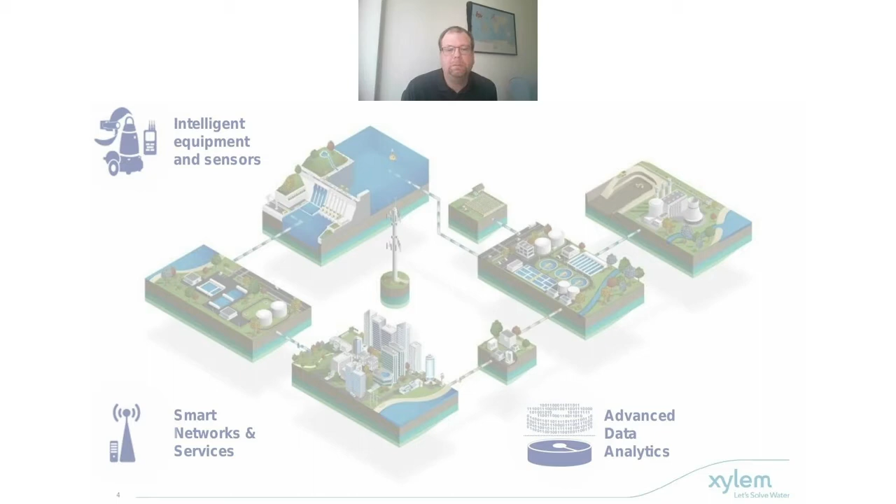One of the things that I was a part of was a group that put together information, talking to customers, contractors, and consultants to get information on where we are when it comes to BIM. With that, we put together a web page to share the information we have received. You can see the link here, which will also be shown at the end of the presentation.

One interesting result, not probably too surprising, is that 91% of the planners we asked design with BIM in the construction business today or soon. So that's already a very high adoption rate for something such as BIM.

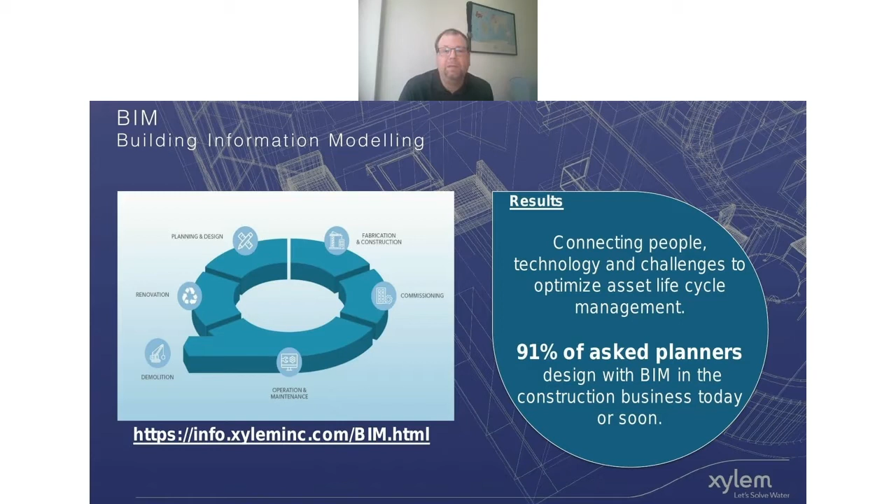But one of the challenges with BIM is it means different things to different people. Obviously, we have the life cycle of a product and a project, and what BIM means in those different stages. Then we also have the different stakeholders. BIM means something different to an end user or the owner of a facility than to the architect or to the manufacturer of a product going into that.

There's also the different challenges that you have, being able to capture water and energy footprint being one of them, being able to have labor effectiveness, OpEx and CapEx control. All of these different items can be brought together into BIM.

So we have the main different functions or things that BIM can do. Optimization is obviously one of them. Simplification, being able to have one environment for the life of a project. And transparency, so the manufacturer, for example, can give you the data, and that data can then go all the way from a project to the end user and to the maintenance guys that need to take care of it.

One of the interesting things from the business case that we put together was that one of the most important recommendations was for a person at Xylem to be responsible for BIM. As you'll see when we talk to Jamie Mills, we have that position, and Jamie has filled that role. So that was probably one of the most important things, that we need someone responsible for BIM for Xylem. And that is something that we have done.

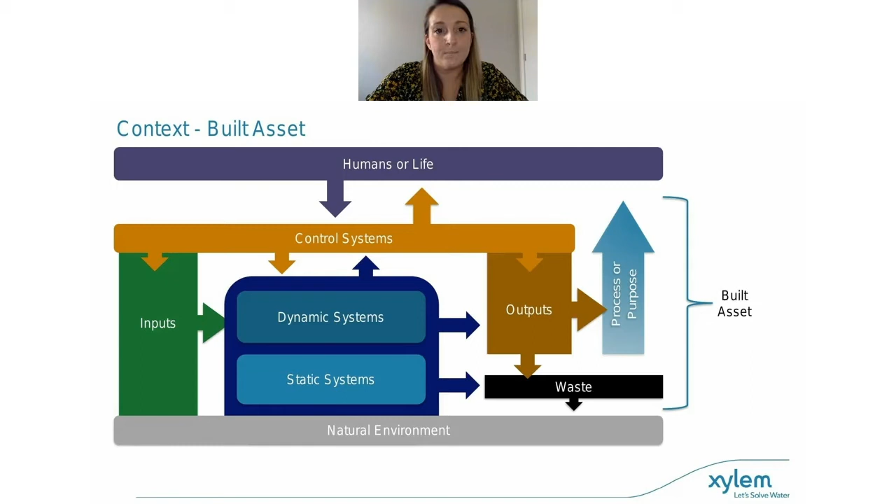Okay, so I heard some terms there, particularly around technology, and I thought before we jump into that conversation, it might help to boil things down and set a bit of background and context to what we're talking about. An information model, which we build up through the project delivery - the design and the build into the operation - is going to consist of different systems of maybe static or dynamic components. And if we're talking about a built asset, not a satellite or a spacecraft, it's probably going to be connected to the natural environment, with interconnecting forces or things that connect systems together. And of course, within the systems there's going to be products, and when we're talking about data exchange, it's the information, the properties that describe the individual products, that are important.

To deliver BIM, we're really talking about connecting those properties and data in a hierarchy and structure so we can make sense of it. You can see here in the schematic I'll present, I'm talking about inputs, which could be communication inputs to the information model or built asset, and outputs. Each system is going to have a function which feeds a purpose or process.

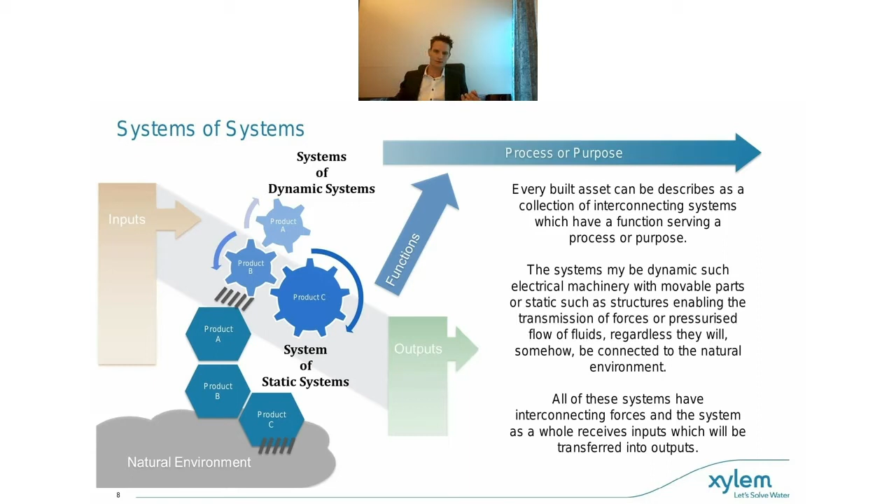Taking that a little further, I've put in the human or life layer - I say humans or life because sometimes we build built assets to do other things than feed human beings' needs. I've also brought in waste and the control systems layer. So the information model of the built asset is going to have different functions and interactions, which again feed this purpose or process.

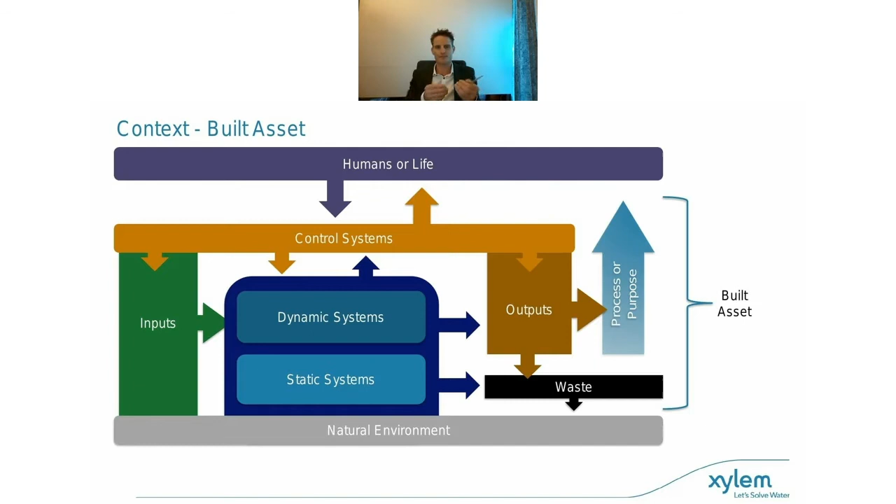And to do BIM, we're going to start asking questions. I've done a typical 20 questions here about what sort of things we'd ask to build a built asset, but we won't run through them all. At the very start, we've got to have a purpose - why are we doing this? Then there's maybe a follow-on to that, there's an output. There's a water industry example - it may be the treatment of wastewater or the treatment quality of clean, potable water for drinking.

We may have some questions or requirements about the environment. If we're going to be extracting water, we probably want to be quite close to a water source, whether that's a good underground water source or a river supply, etc. Then moving through, we're going to ask questions about the design - who's going to design this? How are we going to design this? I think you know where I'm going with this conversation, and that's building up the requirements we need to build a built asset.

As part of the BIM process, we're going to set out requirements at the start of a project to ask these particular questions. It's these questions that are going to get answered by the exchange of information. So what I wanted to do with that first couple of slides was just set a bit of context to what we want to talk about.

As we look at the life cycle of a built asset, we're going to ask questions about decommissioning. Quite recently I've seen something with nuclear waste disposal where we never asked these questions at the start. This is really important - to capture the whole life cycle of the built asset and ensure we've got the right information at the right time to make good decisions.

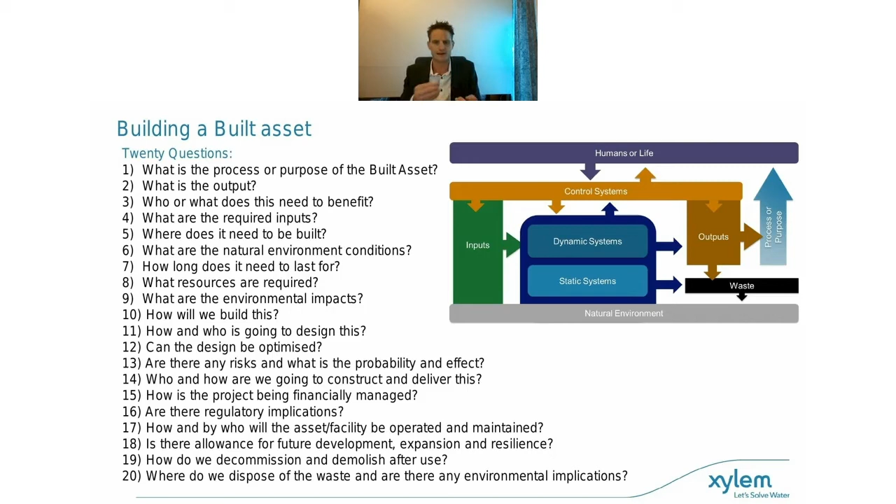I'm going to take that a little further. If we had the information requirements you can see in the grey box down there, that's going to drive the information exchange from the supply chain, and that's going to come through as a form of data. Now, data is great if it's good quality data, so we need a validation layer, if you like, to make sure we're meeting the requirements.

If we start to structure that or do information modeling, start to put classification to it, hierarchy it, make some sense of it, we can then feed that into the common data environment within the project information model. This is going to allow design, construction, commissioning to make the right decisions and get the right insight to have the best outcome for the project.

Then moving over into operation and maintenance, similarly we need a robust asset information model so we can continue to make the right decisions and get the right insight to optimize, maintain and support the asset through to its decommission, demolition and disposal.

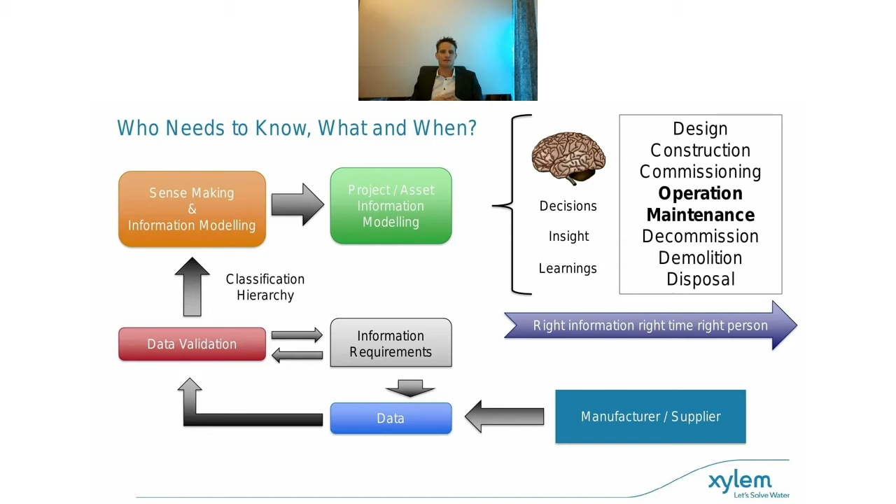So I suppose, what does the BIM journey look like so far? I'll be honest, my expertise is really in the utilities world, especially in the UK, where I chair the BIM for Water group, where we have 20 of the UK utilities as part of that. We see pockets of activity, good activity, different rates of the journey kicking off.

I would say there's an understanding of what good information requirements look like from a client perspective, and those feeding down through the supply chain to direct the consultants and tier one contractors to deliver a good information model. We can see there on reference in the old suite of standards, the 1192 Part 2, with the information delivery cycle and delivering the right bits of information as and when they're needed.

When we've got pockets of good, we've got good delivery of what graphical information should look like, or the non-graphical product data, the support of that, the contractual documentation for regulation, conformity and compliance should look like. But what's the missing gap in making this leap, the exchange to push us forward?

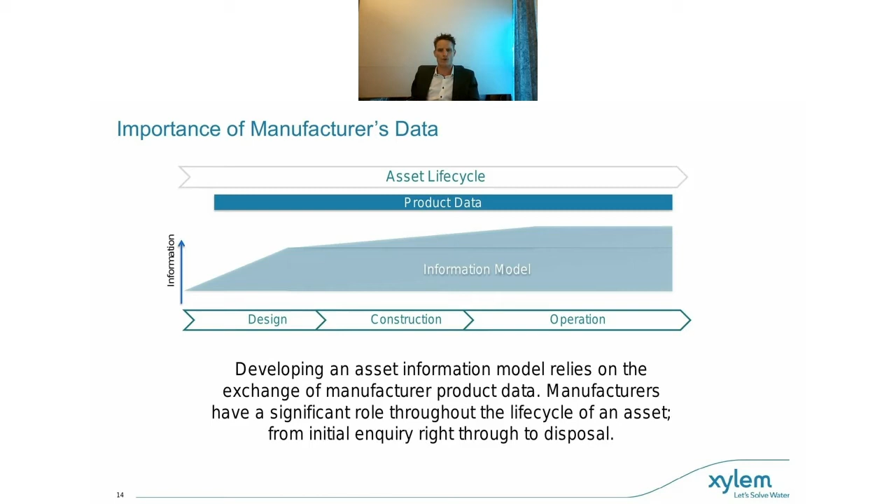So how do I see it for Xylem?

We have manufacturing data, a lot of it. It's very precious to us. It's our single source of the truth. And for us to make BIM work, we need to make a mirror of that, which is fit for construction, fit for design, and fit for operation.

Some of the things I like to think about are time in manufacture, or TIM. So when is that variant configuration fit for manufacture and sale? And then when is it out of sale?

How can I archive this and keep this as a reference, or as a copy almost, which can be brought back at later times? This is how we support legacy projects. How do we get into that space?

What's really important for our customers to make the right decisions? I don't want to give you too much detail - I've got a slide on detail just to open that up and show you what's available. But I don't want to give you too much information either. So the level of detail and the level of information needs to be just right to make the right decisions at the right time when they're needed. And that needs to be on the agenda.

Maybe more importantly, and I've already seen a question around this, is about machine readable data. We've got to move away from thinking that digital is maybe an Excel spreadsheet or an Access type database. We need to be talking about truly interoperable, connectable data formats that work with a multitude of systems in a multitude of countries with a multitude of different regulations. So from a global manufacturing perspective, that needs to be key to making this work.

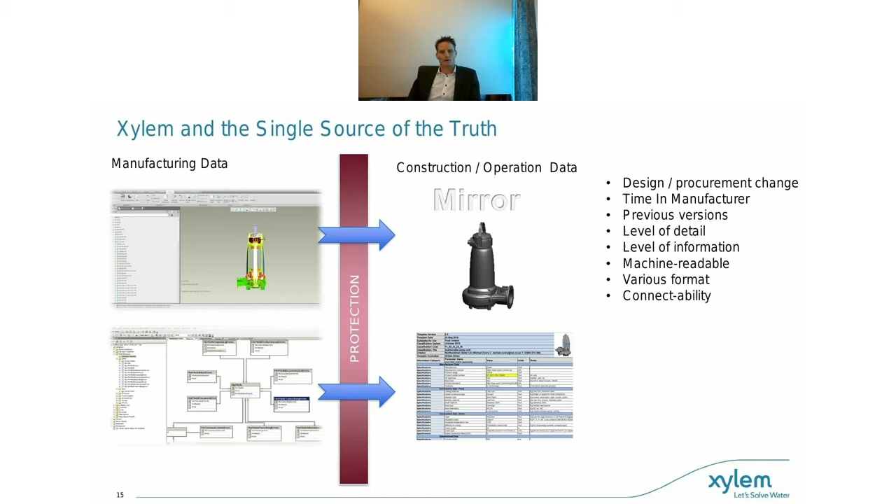So again, how much data? We could tell you everything to go away and build a product, and that's not the aim here. The aim is to give the right amount of information so the right decisions can be made at the points they need to be made, with the right source of truth. At Xylem, that level of thinking as we all go through this digital journey is how we make that happen. How do we make those connections?

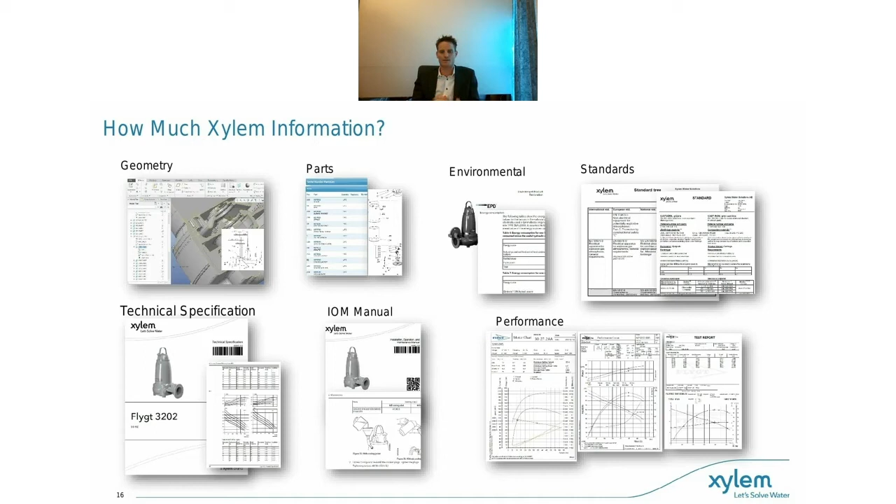For me, the flow of information for engineered products - these are things that require additional thought, like pumps, specialist treatment, UV reactors, anything like this. They need to go through a selection tool where you'll be essentially asking questions and pulling out requirements from a product, and that has to happen within the Xylem e-tools.

What we're actually doing there is pulling from Xylem's back-end data, which could be the PLM, the product lifecycle management systems. It could be our manufacturing execution systems. It could be the enterprise resource planning systems and associated databases that hold this gold, that single source of the truth. And it's how we package that, mirror that, and safely transport it through a machine readable format down to the typical engineering tools, of which there are some examples on that slide, that can then be integrated and federated together by the different stakeholders to feed into the customer's top-end systems.

And if that's the flow of information, that's where we should be focusing our support - getting the building blocks to make information exchange work, and to enrich the asset management system, the AMS, or the computer-aided facility management systems, or the building maintenance systems, etc. That should be the focus. As manufacturers, certainly from a Xylem perspective, we want to be part of that journey and feed into that. We don't just want to stop at design and construction.

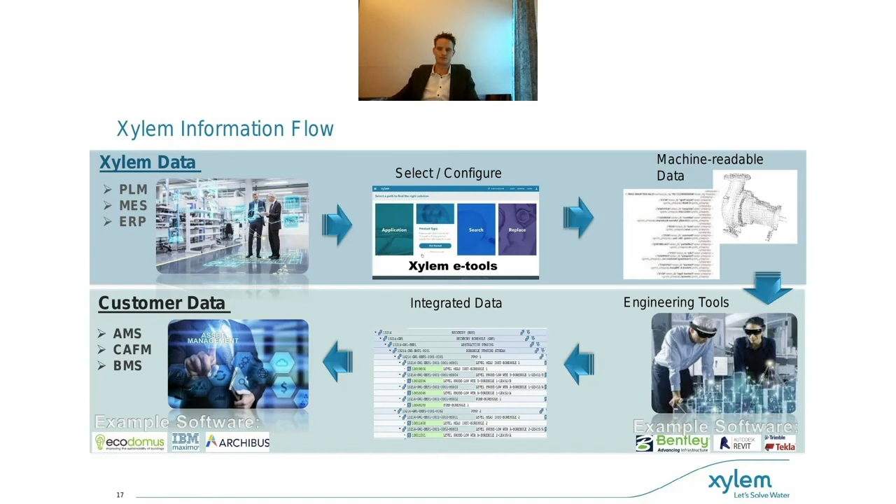So I'll put this together to highlight some of the tools we've got. Let's work with what we've got first before trying to do something fancy. We've got some really nice tools around pump station design - that's moving to a 3D environment, one of Adam's applications, he's the owner for that. Thinking about what we do in terms of graphical data - how do we present that, what's good for the different countries we operate in. That works at the design stage.

What about tendering? What about these selection tools, the project spaces within that? How do we exchange that information, make things quicker? Let's move away from email exchange, let's make it more direct - Xylem application engineers working with project engineers. And then how do we support post-contract? Where's a single source of the truth for how that product left our factory, and how can we support our customers through spares, replacement, service type information, etc.

Again, it's all about presenting to the right person at the right time, as and when they need to know that information.

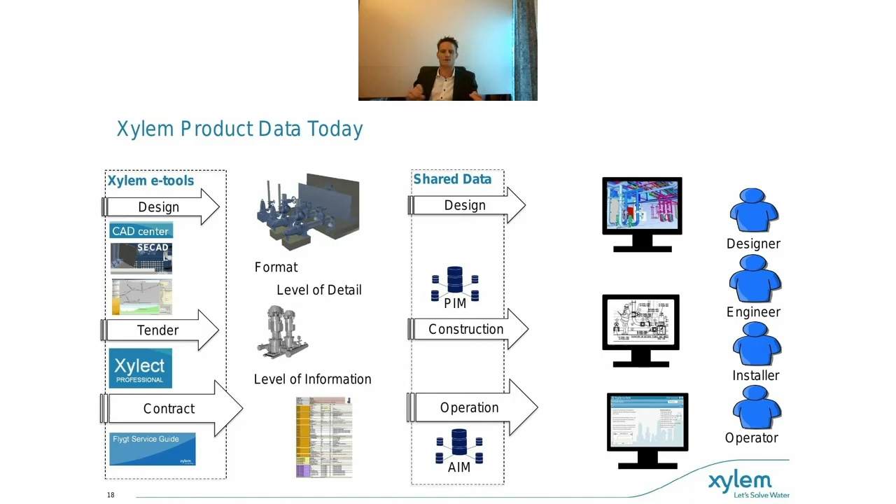I just wanted to give an example of a project we've worked on where we've done some of this exchange. This is embedding a selection tool project, working directly with a tier 1 contractor to put that within a piece of design software. What that's enabled is good communication between Xylem engineers and the project team engineers, and removes the need for exchange of emails or exchanging direct through one application.

That will also now go on into the asset information model and allow operations to directly connect with, again, the single source of truth, but information about operation, maintenance, etc. What's critical about this product and the performance of it as well. And I think really that's what I wanted to open up and share a little bit.

Thank you very much. Thank you, Rebecca. Free. Okay.